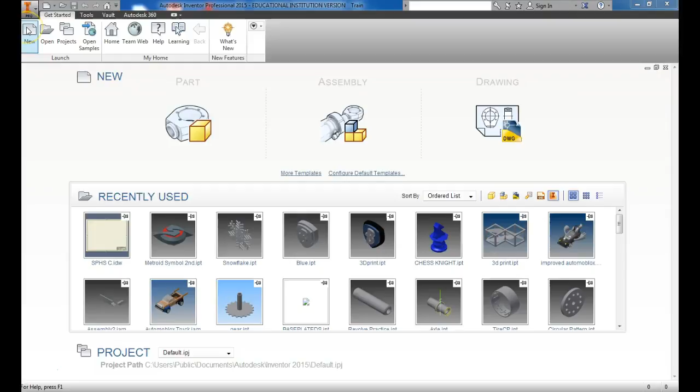Now that we've finished the train, we're going to start dimensioning it in a set of working drawings. Now these are going to be a little more detailed than anything you're used to, so be sure you follow along quite well here, because it's easy to get lost, but it's really easy to do if you just pay attention to little details. So the first thing we're going to do is click New, and this time we're going to work with an SPHS C.

So this is a C-size sheet of paper. It's going to be bigger. What we're going to do here is just call this our miniature train. Whoops, train, Peterson 1, and the cover sheet is always going to be the first page. Okay? So once we have this, you can see now our border here, our little template, is a lot smaller than it used to be. It doesn't take up as much page space because this is a much bigger sheet of paper.

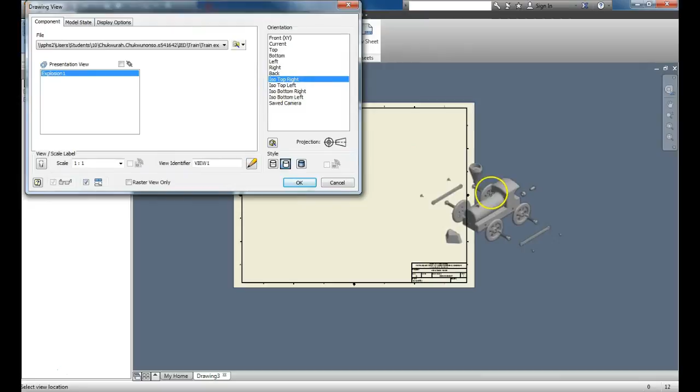So just like we always do, we're going to come in here and drop the assembly. We're going to drop the explosion. I'll go ahead and put the explosion first. And you want it a good ISO top right. So remember, if you didn't make yours in the correct orientation, just click the custom view right here. Set it whichever orientation you need it to be. ISO top right is pretty normal for us though. So you want it in this orientation. And then just say finish custom view.

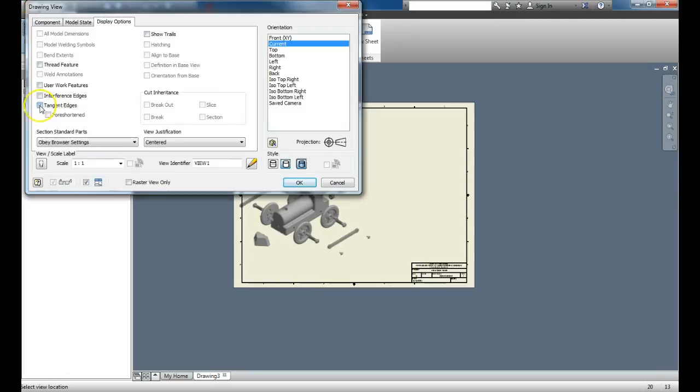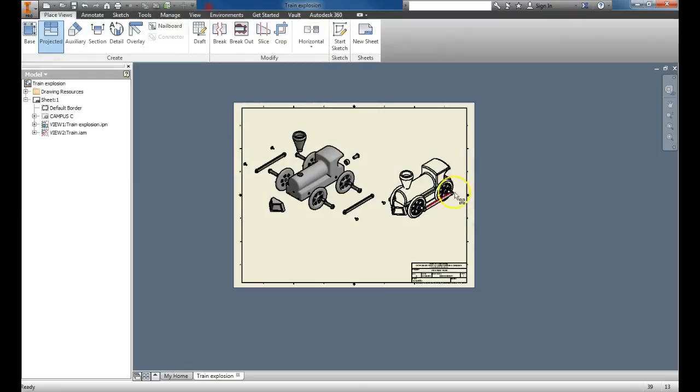We want it to be shaded. We want no trails, and we want no tangent edges. And we can just hit OK here. Right click OK. And now we have our train body set down. Next we'll want to add the assembly. So I'm going to just come back to base, add in the assembly, and put it right next to it. ISO top right again. Oops, I forgot to color this one, so I'm going to come back in and shade it. Make sure my tangent edges are turned off. Alright, there we go. So we'll just kind of take these, make sure they're centered up.

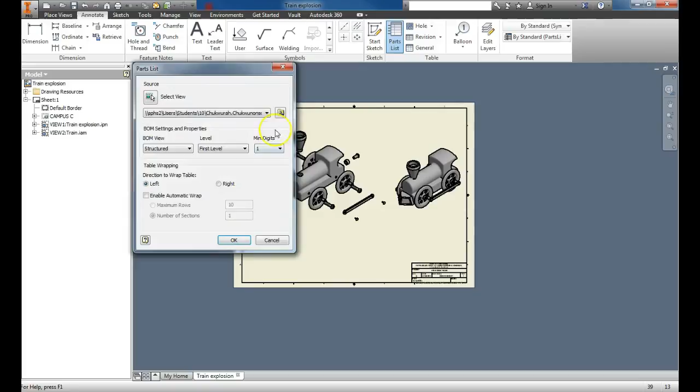Next thing you're going to want to do is add your parts list and balloon it. So under annotate, you're going to click parts list and choose your parts list here in your file. You want it out of the train assembly, so I'm going to go down to train assembly, hit OK, hit OK. It's going to tell you this thing about a bill of materials. Just hit OK on that. And then dock this down here in the bottom corner.

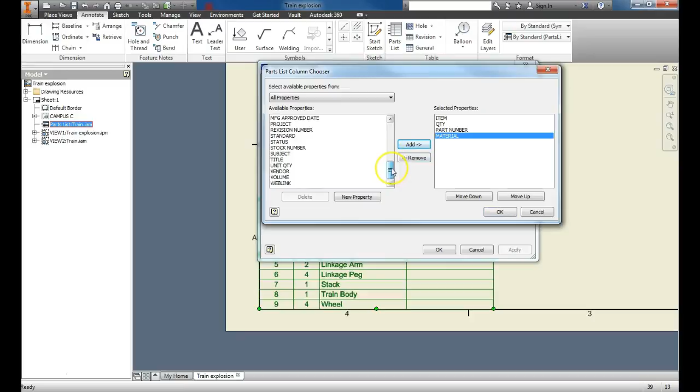Now if we look at it, it's got some blanks. We want to alter these. So I'm going to double click on them. Click on my first column chooser button here. And just remove description. And I want to add in material and volume. So material, we're going to add it over there. And volume, we're going to add over there. Okay, and we're just going to hit OK. Apply that, and OK. And then you should see here a nice updated parts list.

Now remember, these should be in all caps. So if yours is like this one, just come back through, retyping whatever it is you need to use here. So I've done cow catcher, axle peg, oops, hitch magnet. Now if you hit enter, it'll do what just happened. So be sure you hit the down arrow, or you can click on the next one. Either way you want to do it.

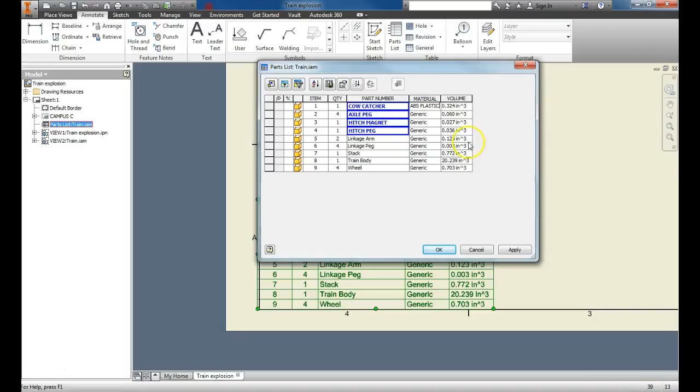And then all these generics, remember we should have changed this to ABS plastic. So make sure you change over to ABS plastic in your parts. So do that to all of them, hit apply. Then you should see over here, it might be a little bigger, you might have to readjust some things. But it should all fit. Eventually make it all nice and pretty. Okay? So once you have this part done, we're going to go ahead and balloon it.

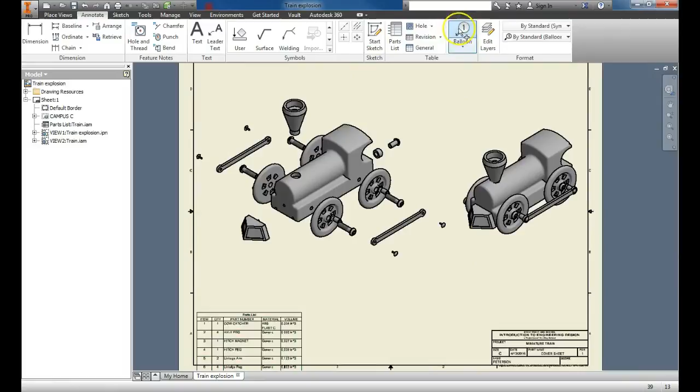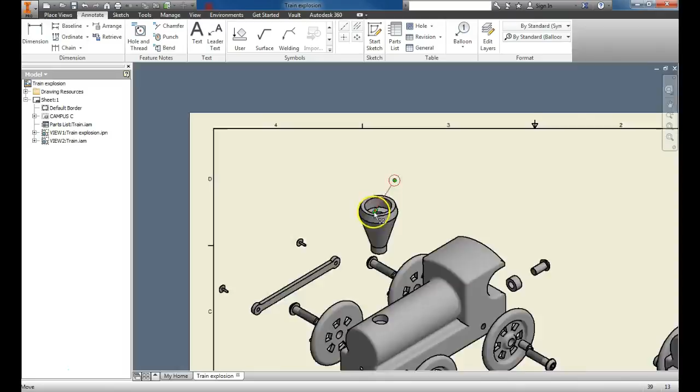So balloons, let me show you how these should look. You kind of want some kind of rhyme to them, or reason, or pattern. So again, make sure that you're clicking in your edge. Do you see how my edge of the leader here is coming from the inside of the part? We don't want that. We want the edge to come from the edge of the part. Alright? So it should point directly at an edge. It shouldn't go over a part like this. You'll be reduced points for that. So be sure you get it coming off of an edge.

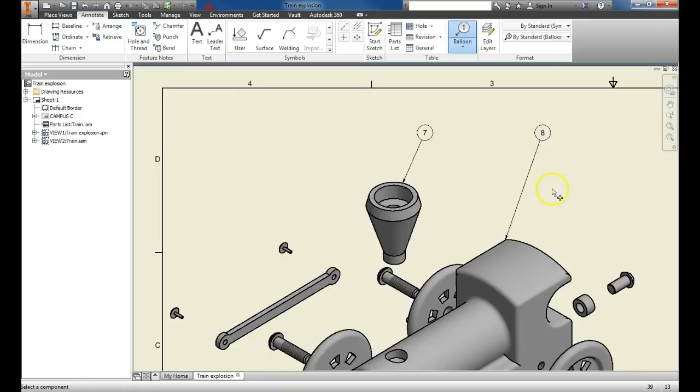Alright? Let me move this up real quick. See, I'm just going to delete it all together. We'll start that over. So balloon, I'm going to come from the edge here, and I'm just going to double click. And then my next one, like say the train body, I'm going to come up about at the same angle as the other line, and then put it on line. So you can see here how the dots show that it's on the same line. And that just keeps things looking kind of nice, like you planned it, so they're not just slapped up on there.

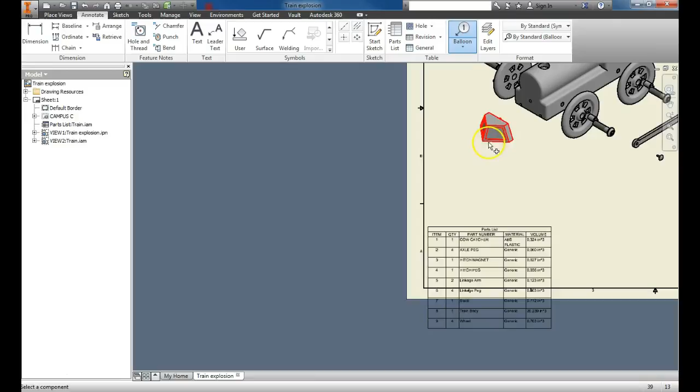Alright, so those are those four, and then you come down here and do the same thing to the rest of them. So say you want, oops, didn't mean to double click that. Say you want to get your cow catcher here, and then your wheel as well, put it on the same line, your axle peg on the same line, your linkage arm on the same line. Oh, that one's not wanting to play, but we can get it close enough. And then finally this last one. Okay, so now you can see they're all lined up and they look good.

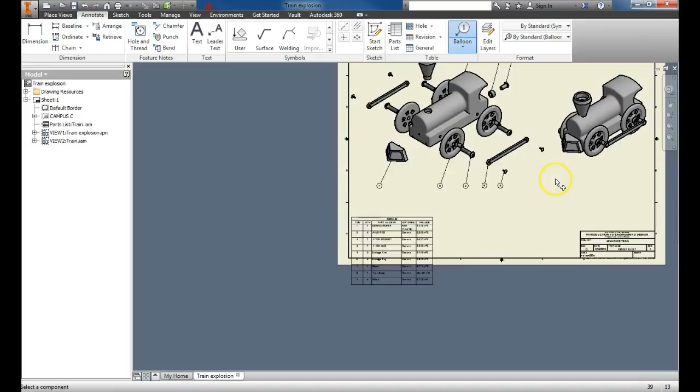All right. Next thing we're gonna do is set up the train body. So I'm going to come back here to place views, hit new sheet, fill this in again, miniature train, Peterson, first period, and then train body. Now this is where